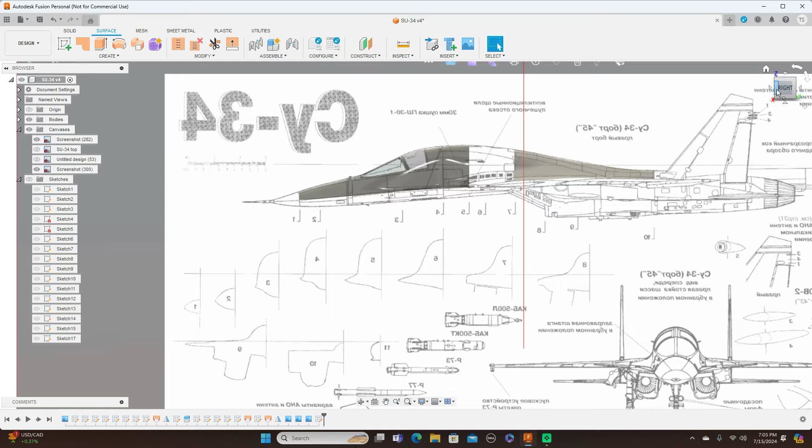Last video I showed you guys how to do this front section here, and I went ahead and worked on this back section too, but I'm not going to repeat that. Let me turn the canvases off. It's sort of repetitive showing you guys how to do this back half, so let me turn off the bodies here. I just went ahead and put those formers, the shapes, just like I did the front up here, back here.

Then I went ahead and put control lines in here also. So when you saw me trace these curves, I just did the same thing back here and put these in, and then I lofted these. After I lofted that, it gave me the shape here that I needed.

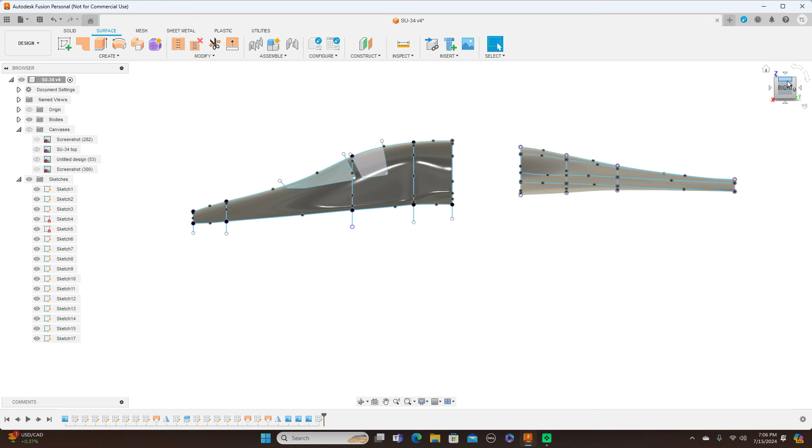These control points here, you can move these around too to get the shape even better, like you want. Like the front up here, you can do the same thing, move these shapes to get the front better also. And what you could do is put a control line here through here, and you can pull this out and adjust all this stuff to do that.

But one thing - when you loft this curve to this curve to this curve, etc., all the way back here, you just put a control line here.

I'll show you what I mean. Go to Create and do a loft and rails - I'm sorry, these are called rails. You want to put rails here.

What you have to do, like I did back here, I put these rails back here. They touch each one of these curves, and they have to touch each curve, because if they don't touch the curve you can't use the rail. So the rail has to touch each one of these curves.

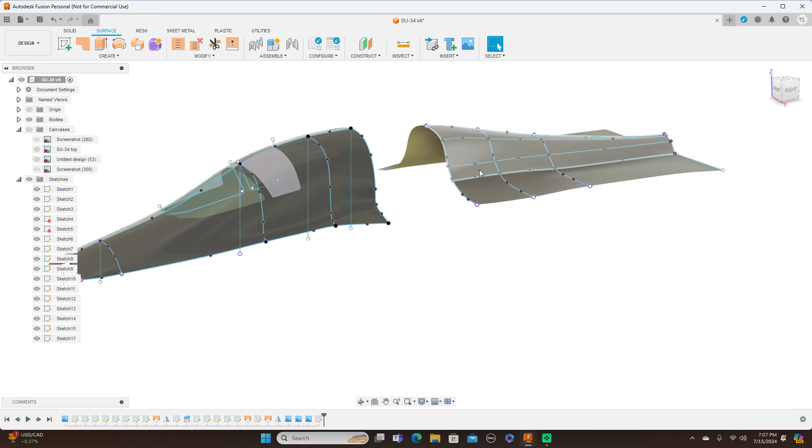What I'm going to do today, let me turn these sketches off, turn the canvases back on. What I'm going to do is look at modeling - let me turn the bodies off - the bottom half of this SU-34 here.

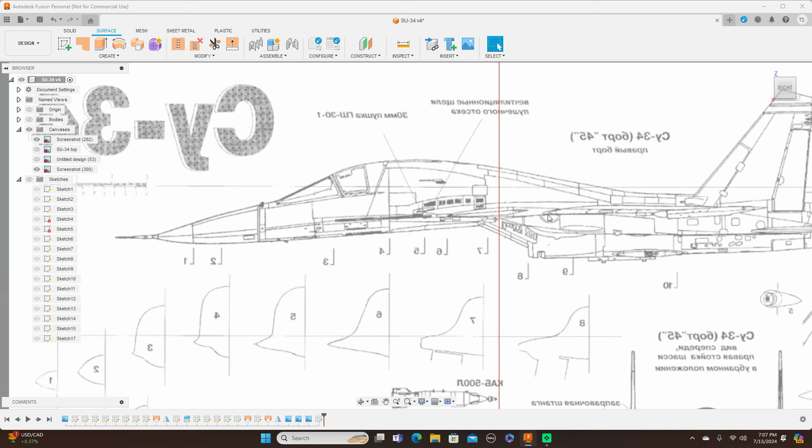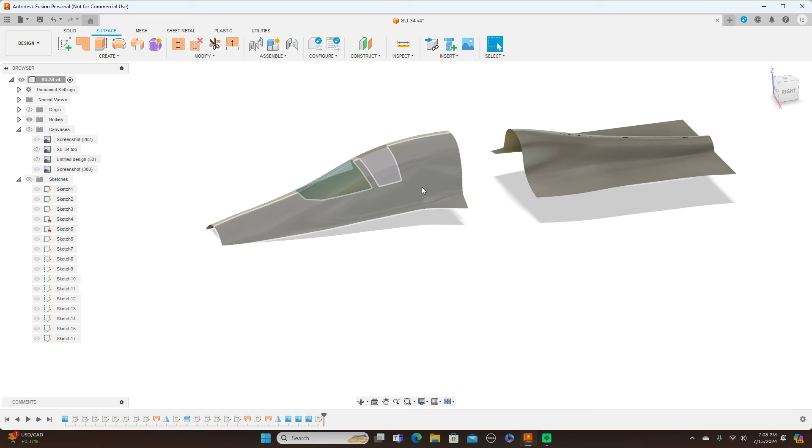So what I'm going to do now, let's take a look at these. Well, let me go ahead and close this up first for you guys, show you how to do that. Let me turn off the screen canvases. Now, as you can see, we have a line here to here, a curve here. And I'm going to loft from here to here, but first I want to close this up here and close this right here also.

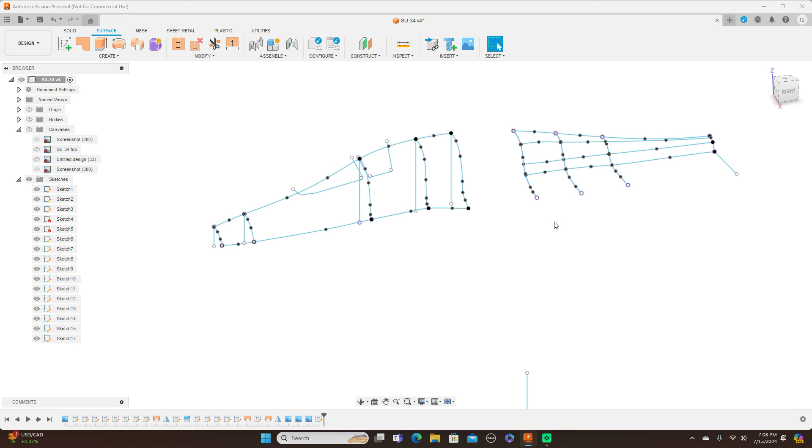So change this to solid, create a sketch on this plane here. Rotate this, make sure that you have your 3D sketch turned on over here. And I'm going to select the fit point spline here and here, click OK. And one more.

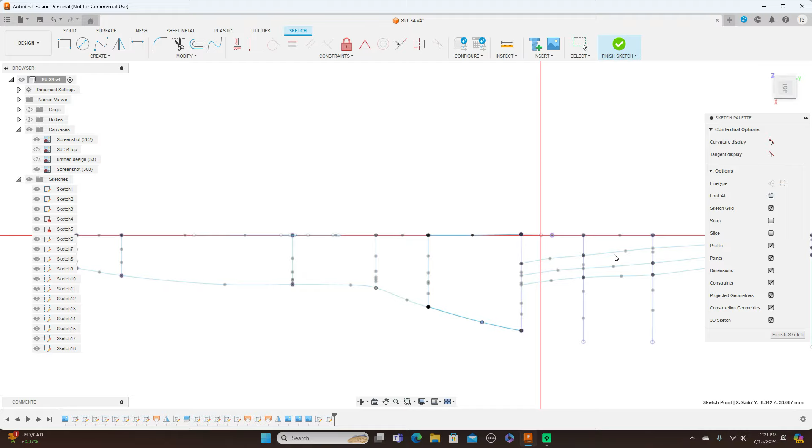Look at this from the side. Turn the canvases back on. Move this down. Move this up. And move this out. And this goes up through here. Okay, go ahead and finish sketch here.

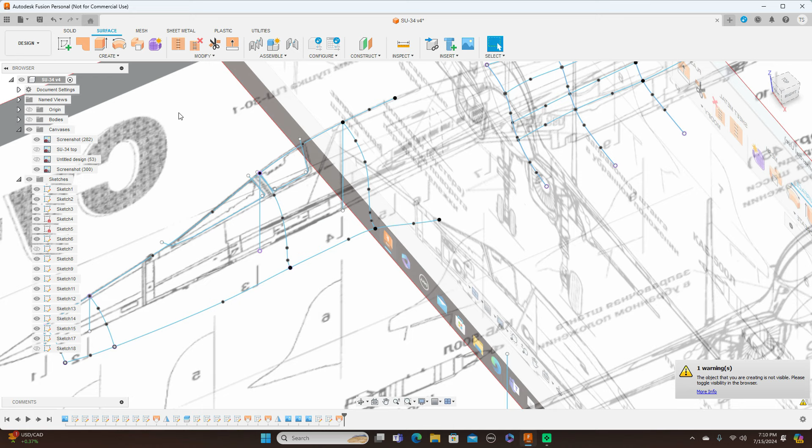And I'm going to do a loft, surface loft. I want to add the rails, so I click this plus here, here, and click OK. Now we turn the bodies back on, turn the sketches off, turn the canvases off. Okay, here's what we have.

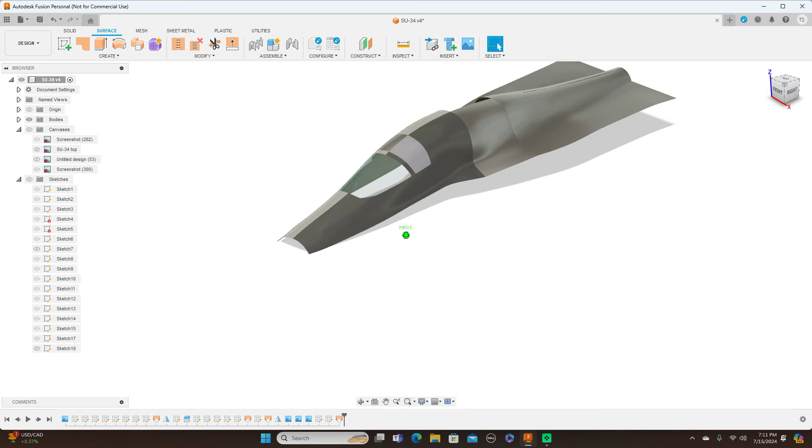And we can go ahead and mirror this. It's a mirror line. And click OK.

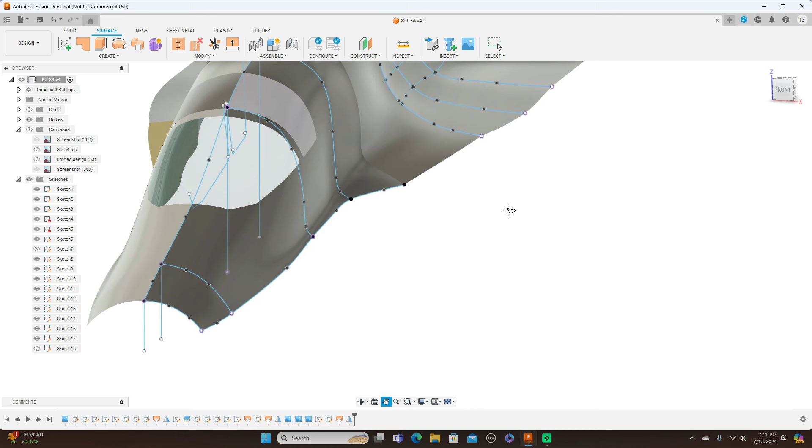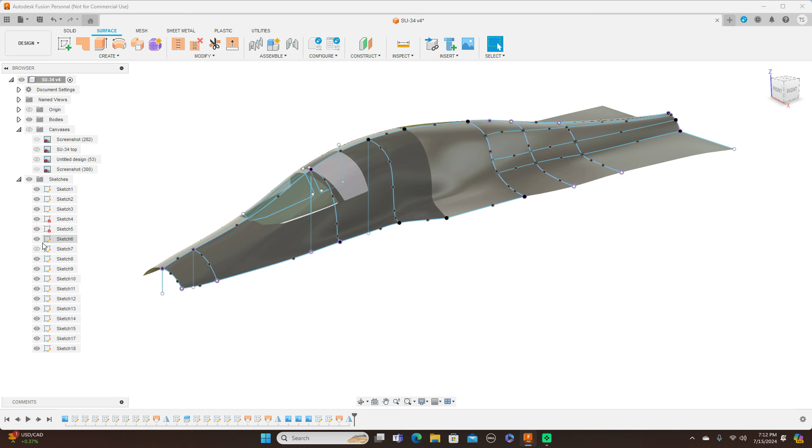And what we have to do here, what you want to do is, with the sketches here, create some control points - excuse me, rails - here to here, so we can pull this out a little. Or we could just even turn the bodies off, move this out a little.

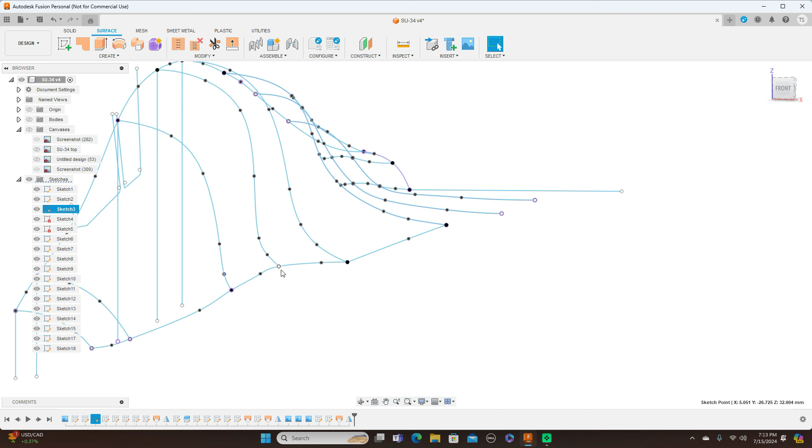Look at this from the front. Okay, pull that out a little. And I'm going to pull this out a little, and this one.

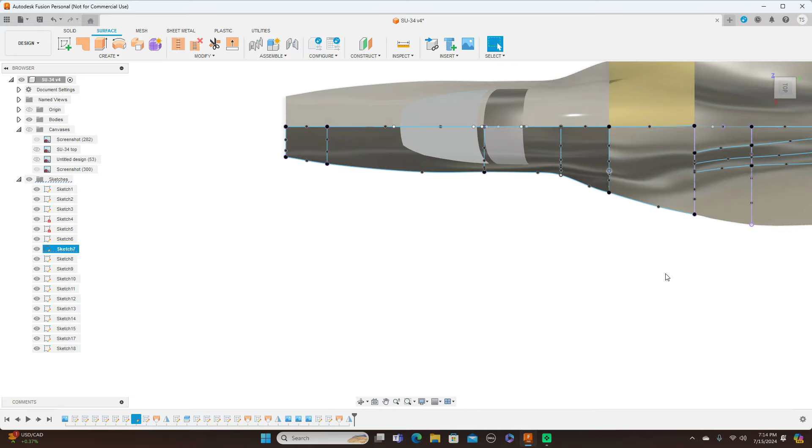And what you want to do is keep moving the points around until you get the shape here that you really like. Let's see, go back here.

Turn the canvases back on and the sketches off. And this is what we're looking at so far. Excuse the background, I believe there's a cricket chirping. Oh well.

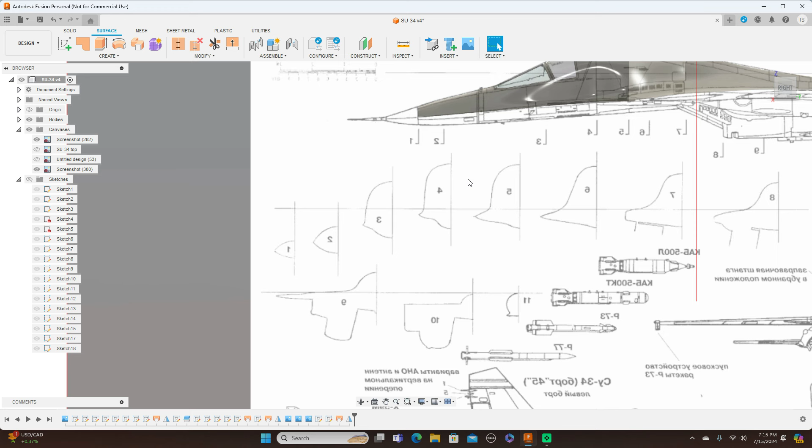Now what I'm going to do is start lofting some of the stuff on the bottom here. So the first thing, I'm going to turn these bodies off and create a sketch on this plane here.

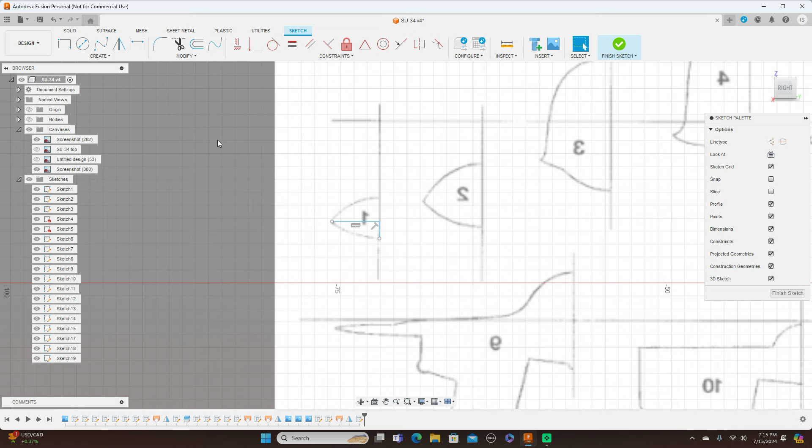And I'm going to move this sketch here. Finish sketch. Turn sketches back on, move copy, and change this to sketch objects. This point here, this curve and this - select all these.

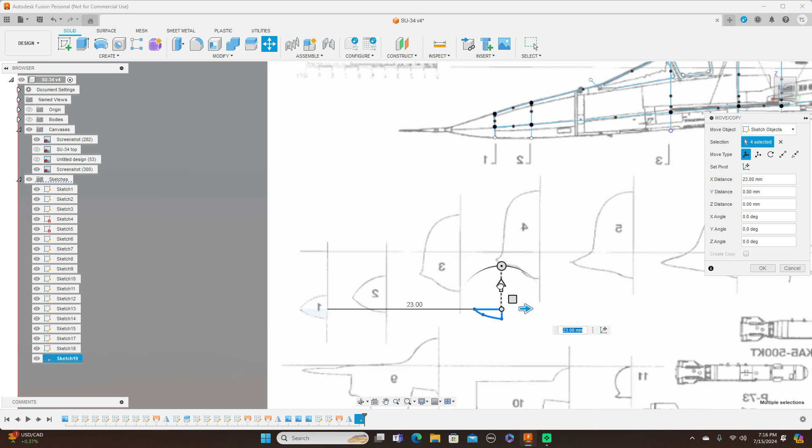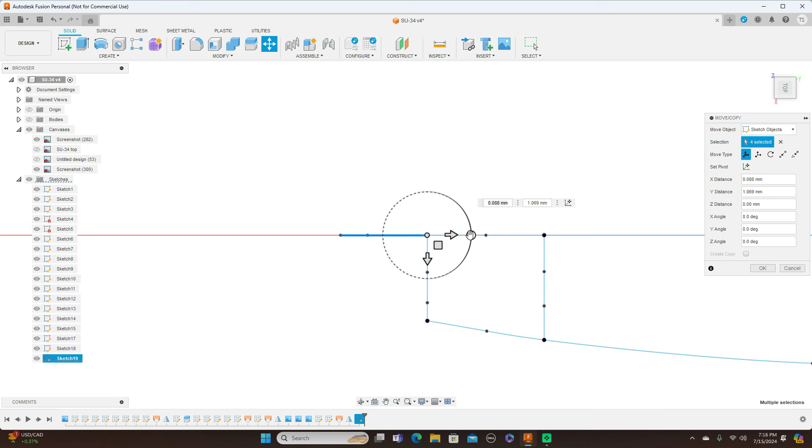And rotate this, click OK. And that is too low, we'll move it up.

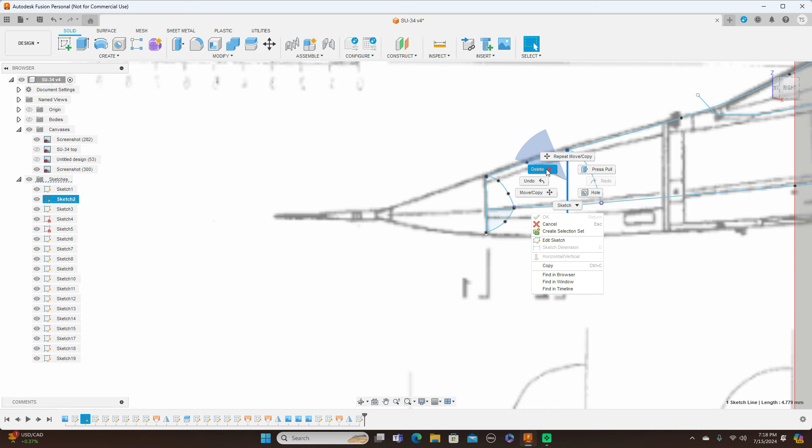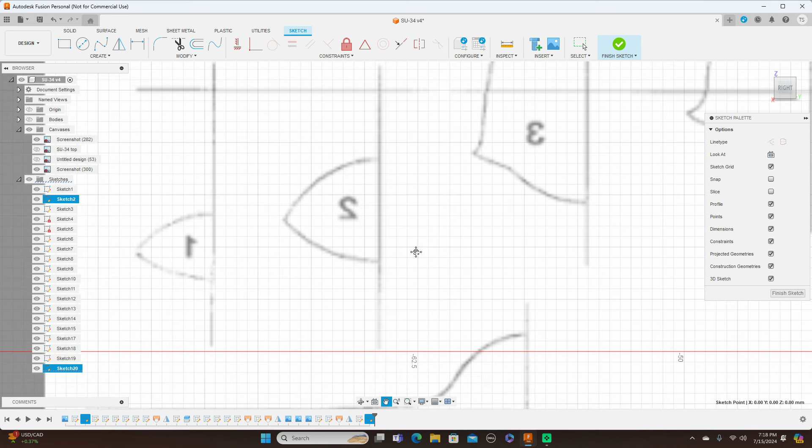I'm going to delete this line here, and on to number 2 here. Okay, finish sketch.

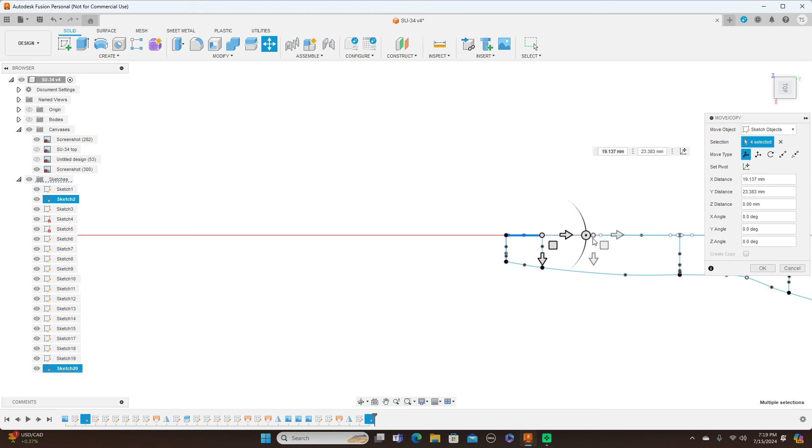And move this one up here, move copy. And number 3.

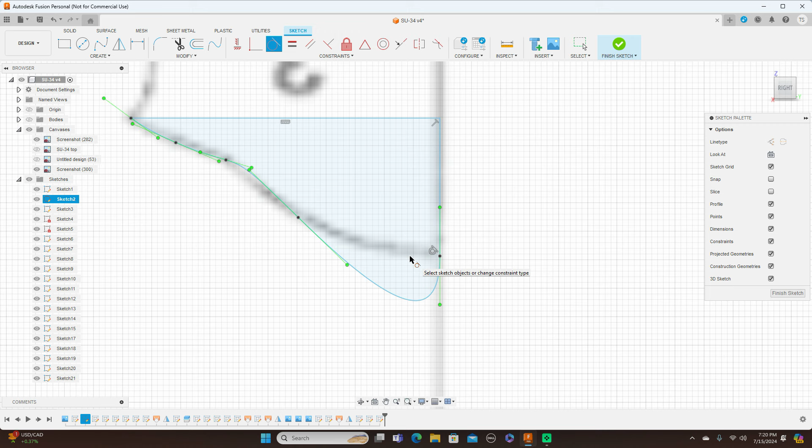All right, I finished the sketch. Same thing, move copy. Point here, select these.

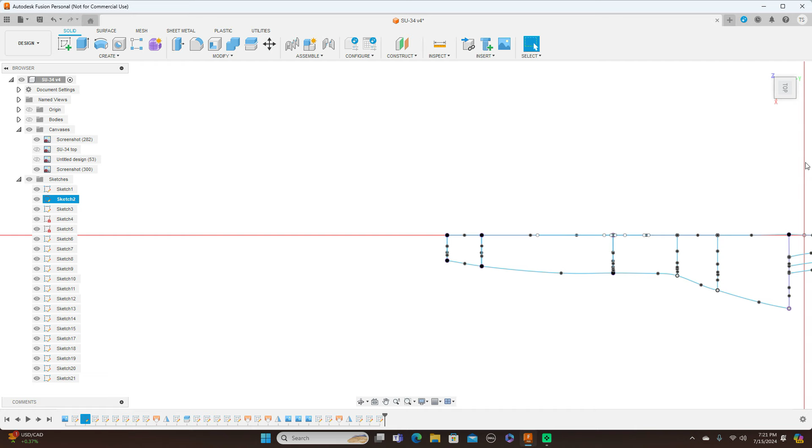And rotate this 90 degrees. Click OK. On to number 4 now.

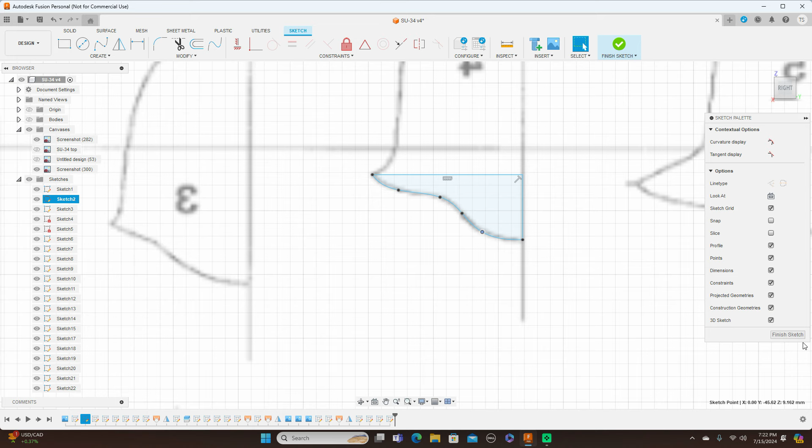Finish sketch. Move copy.

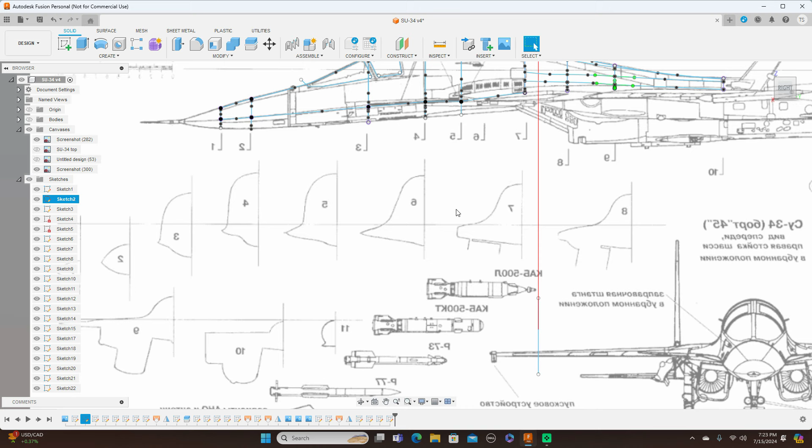Turn the canvases off for a quick second. Have a look. Delete this line.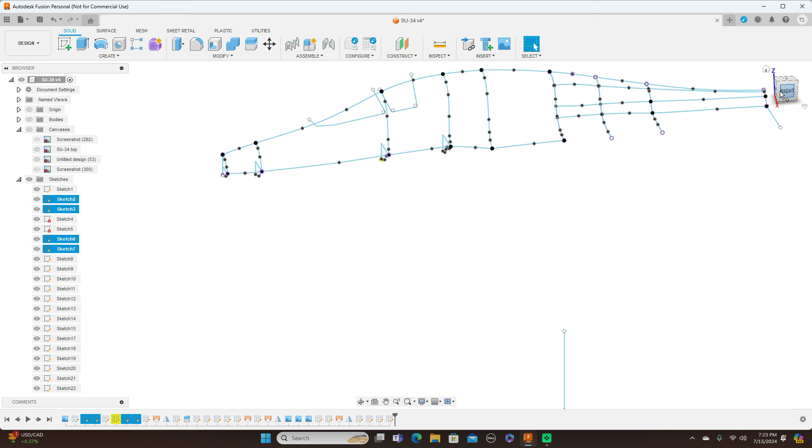Okay, put one more in here. Number 5.

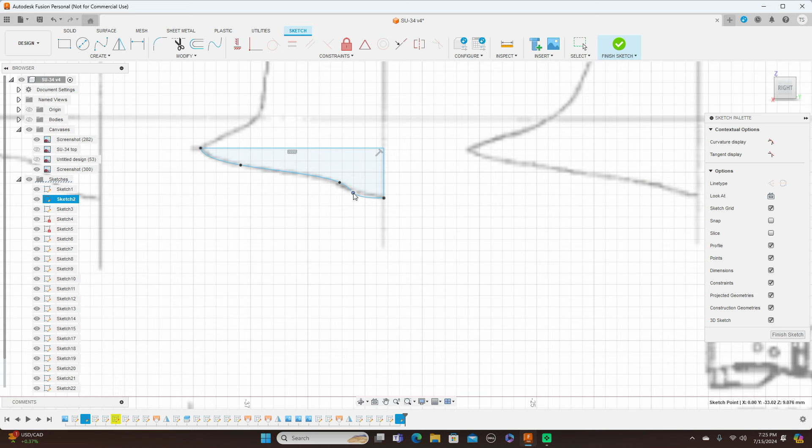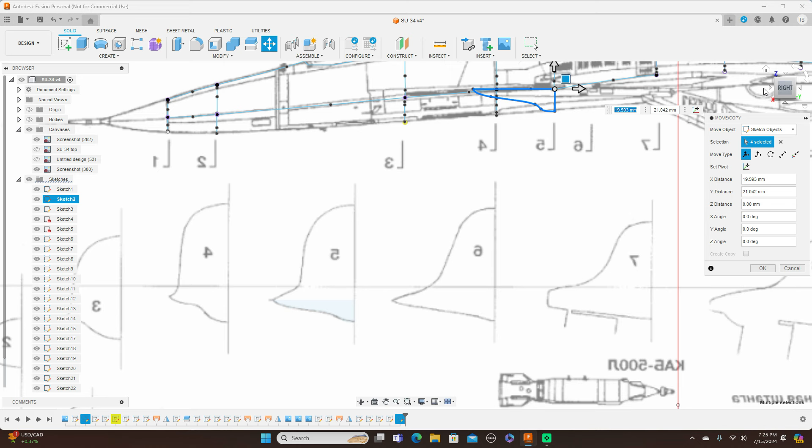Finish sketch. Okay, go ahead and loft these and see what we have. Not sure I have to put rails in here because these are all pretty similar shapes. Nothing drastic.

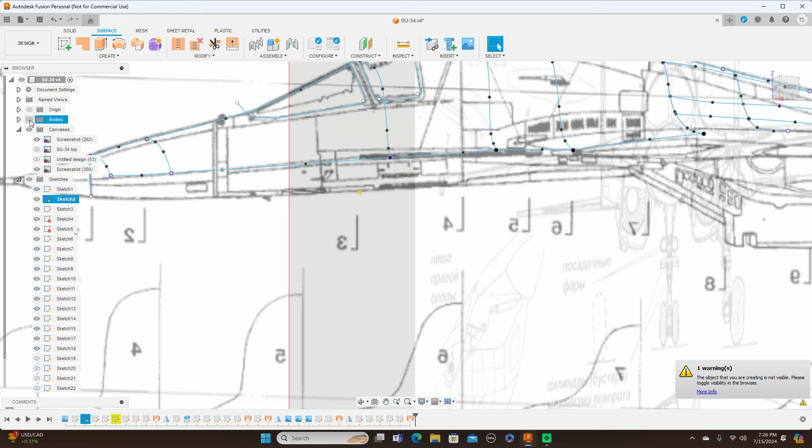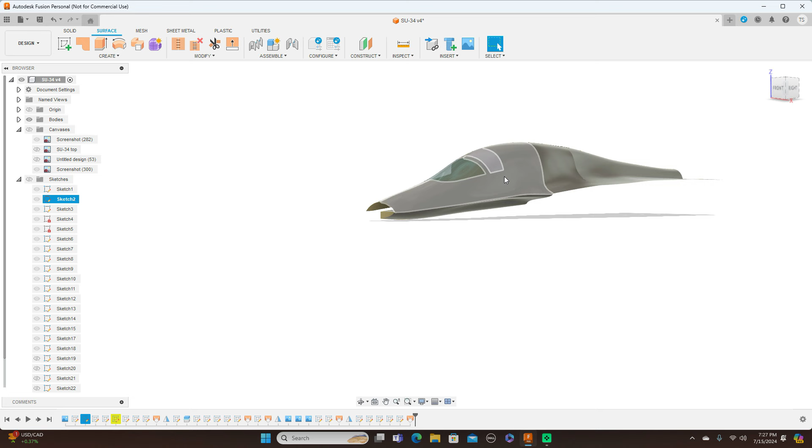Okay, let me turn off the sketches. And this is what we have now. Right through here needs to come out a little.

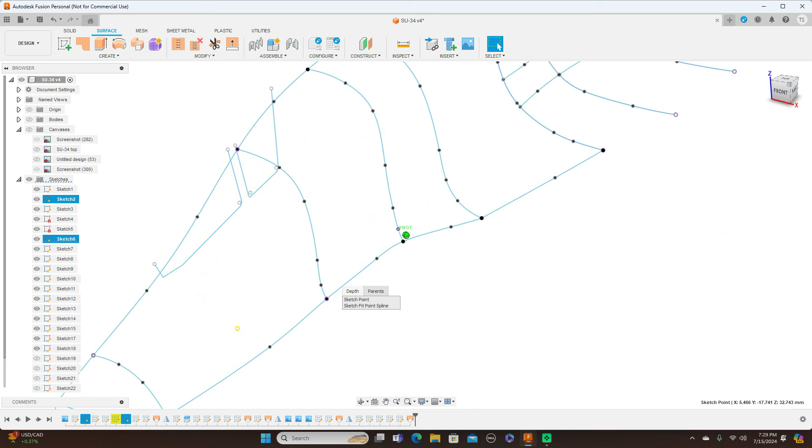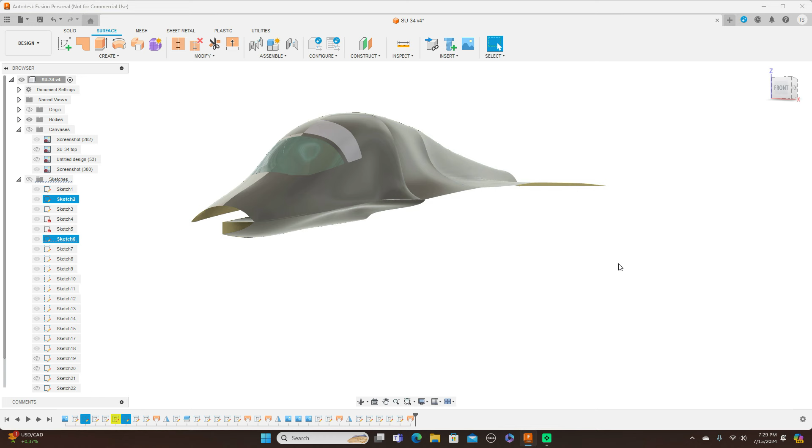Turn the sketches off here. Okay. Well, this is what we have so far. And again, like I said, play with the lines in here, or the sketches, the points. And you can add a rail here too, but when you put this rail in, just make sure the rail connects to all of these here.

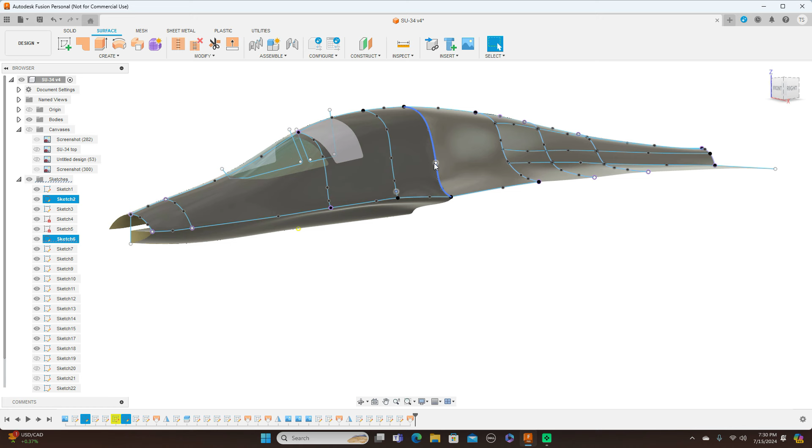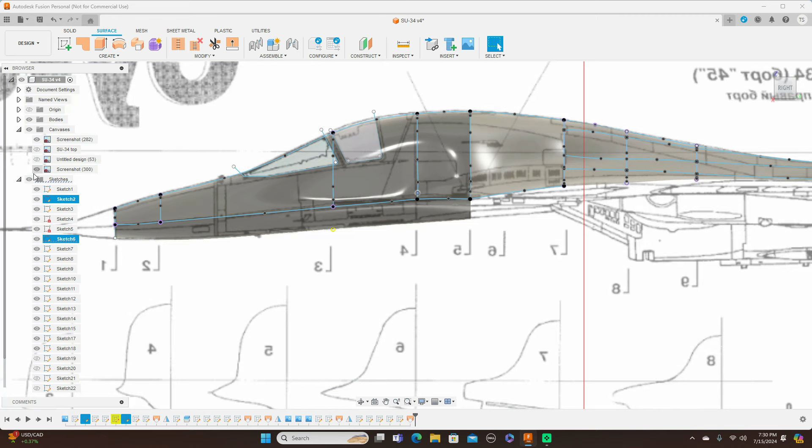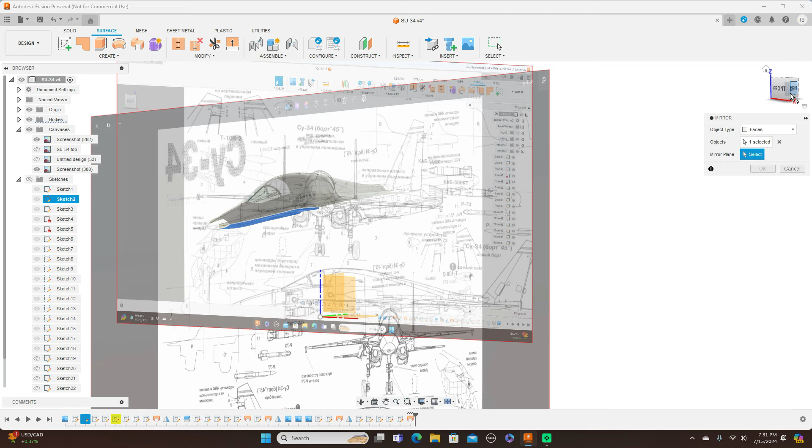Okay, turn the canvases back on and the sketches off. You mirror this on the bottom, in the mirror plane. Now it did not mirror that.

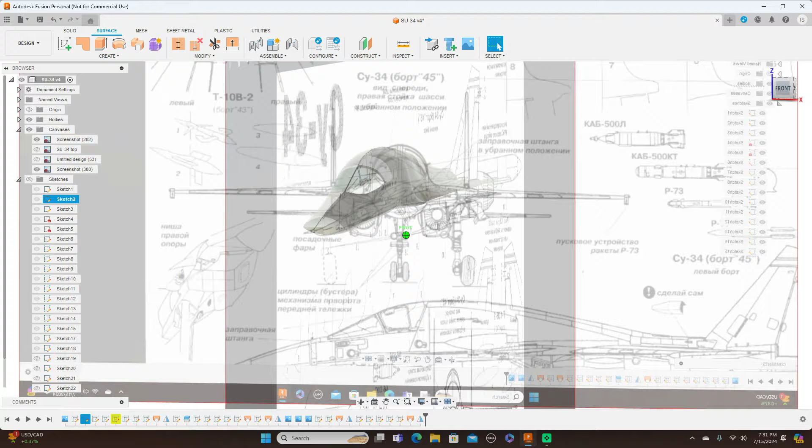And click OK. Now, I don't know why it didn't mirror it the first time, but it did it that time. And this is what we have so far.

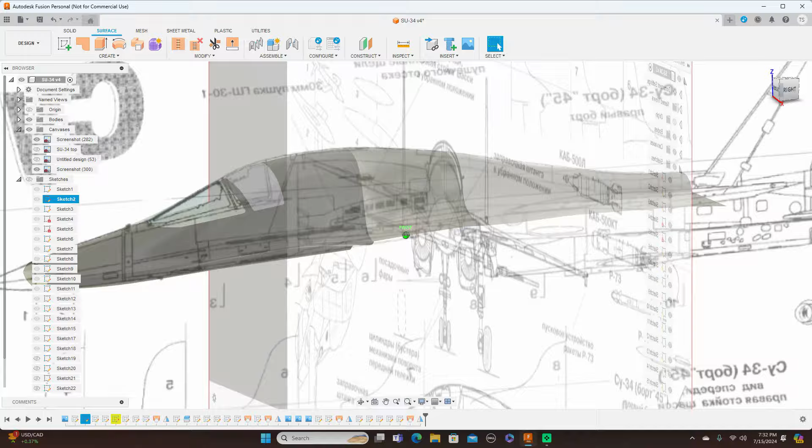Okay. Now, if you guys are wondering how to move further along with this before I do another video, and you're wondering how to put these vertical fins in here, you can do those a couple of ways.

What it can do, let's do an offset plane. So come over here, do an offset plane. This plane here, and move it over.

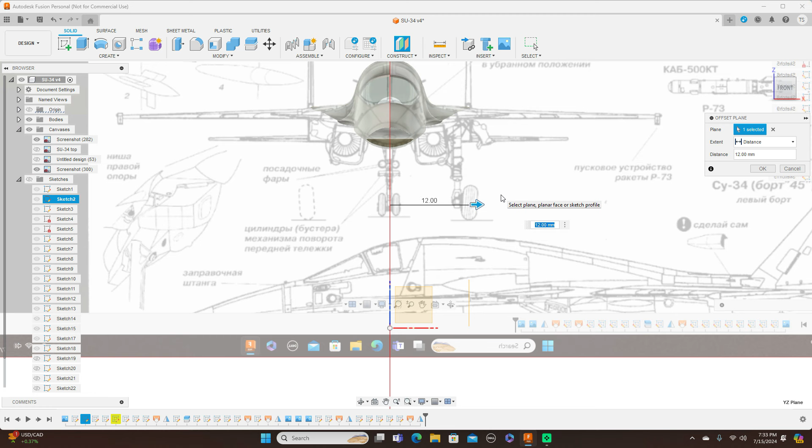And what I want to do is align this to the center of here. So what I should have done, let me cancel this. Do a sketch on this plane here.

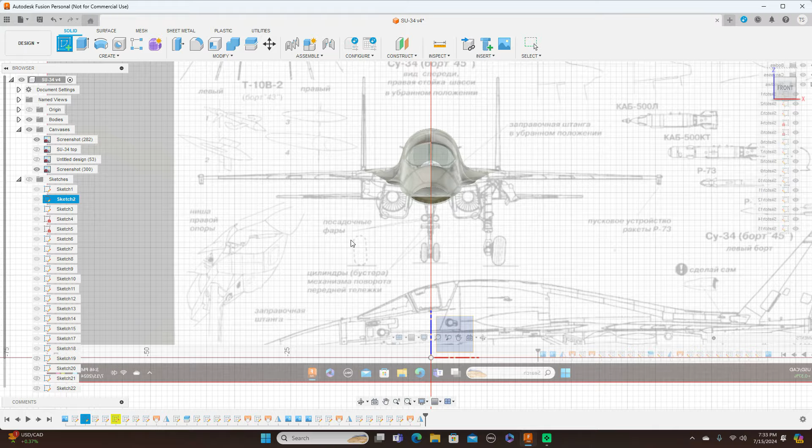Just use a line. Then change this line to a construction line. Finish sketch.

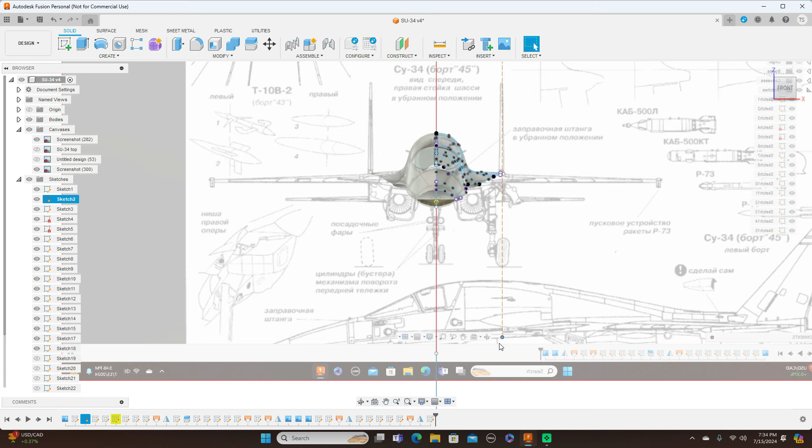Now do an offset plane. Turn those sketches back on so I can see that line. And I can cancel this and drag the line all the way down. And I shifted it over a little.

Okay, now construct offset plane, this, and then move the plane over to that line there. And click OK.

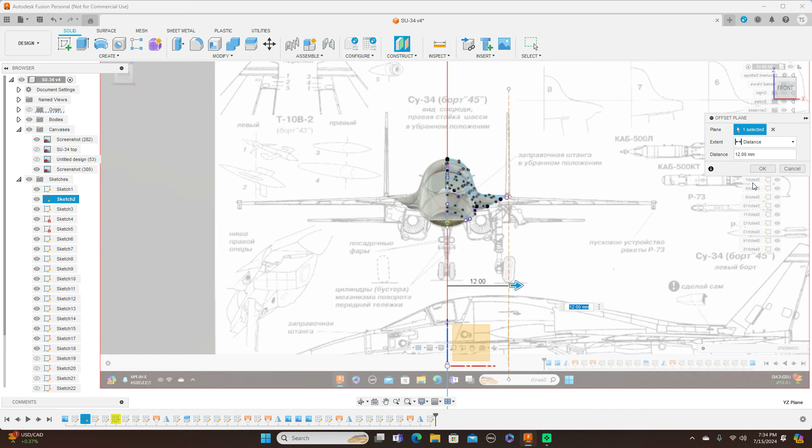And now I want to create a sketch on this plane. So I click that plane, click that. And I'm going to draw a line from, just imagine this coming down through here, and this coming down here, just a line there.

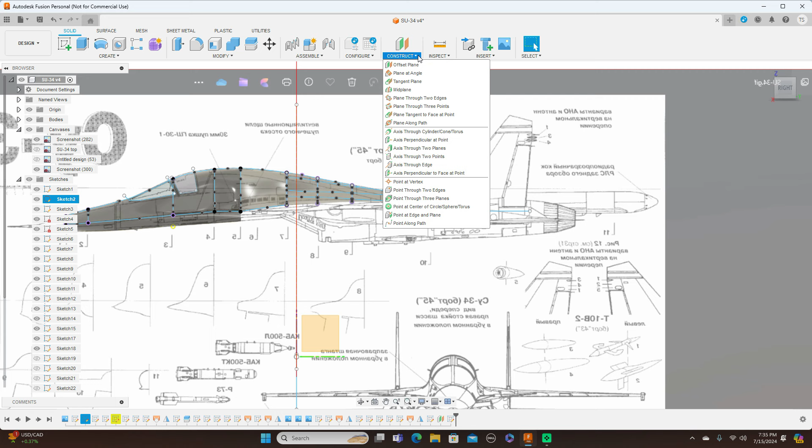Finish sketch. Then what I want to do is do a plane at an angle. This. Select this and just keep this at 0 and click OK.

I want to draw on this plane here. Let me turn these bodies off. And I'm just going to use an arbitrary airfoil here.

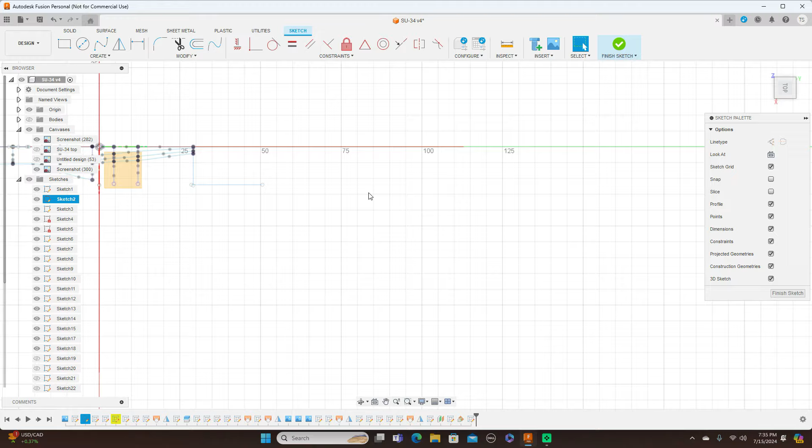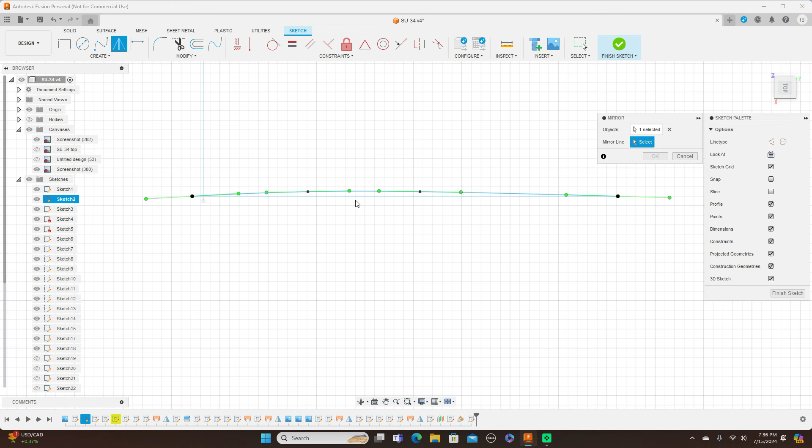And mirror this line here. This is the mirror line. Click OK. Finish sketch.

Then create a sketch on this plane here. Line here. Okay, cancel this first. I need to project this point. Click OK. Now draw a line, just snap here, which it does.

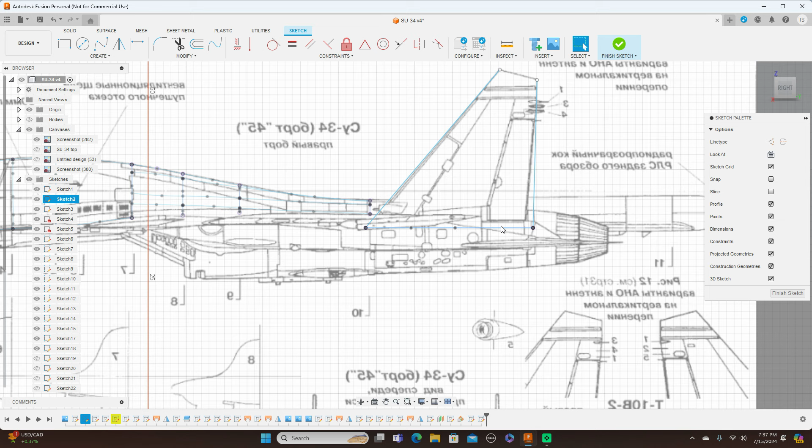And I should have drawn this a little shorter here, but no worries. Then just go ahead and finish sketch.

See where those lines are? They're not on the right plane. So what I'm going to do here is delete these, because I drew them on the wrong plane.

So what I want to do now, the construction... oops. And the last construction plane that I drew, turn this one on. Oh, I want to draw on this plane here.

And finish sketch. And come over here to sweep. Path + guide rail. Full extents. Turn construction off, I don't need them.

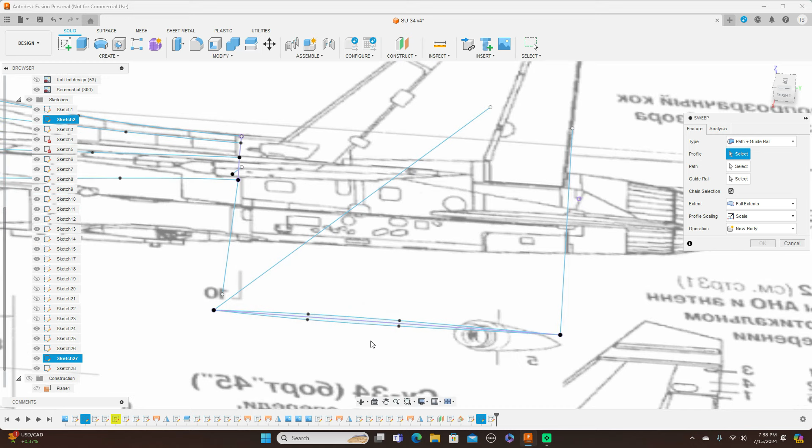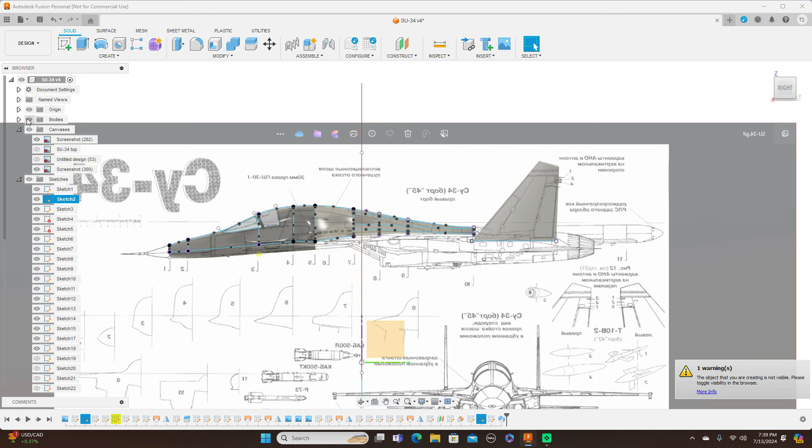This profile, path, guide rail, and click OK. And turn the bodies back on. Turn the sketches off. Okay, now we have that.

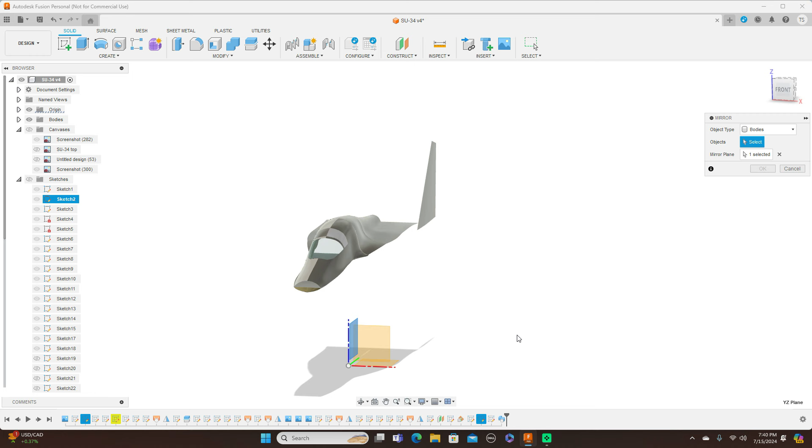And we can mirror this also. Okay, so these are our makings of the SU-34 so far.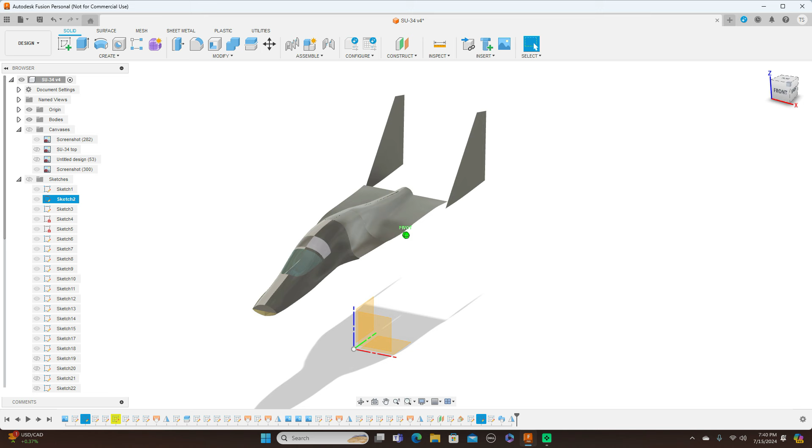Like I said, what you should do is put, in the sketches here, another guide rail in here and adjust that guide rail.

But that's going to do it for this episode of this SU-34. And in the next episode, we'll get to modeling the rest of this down here on the bottom, then the engines. And once we do the bottom here, the engines and the horizontal stab, that's pretty much it for the SU-34.